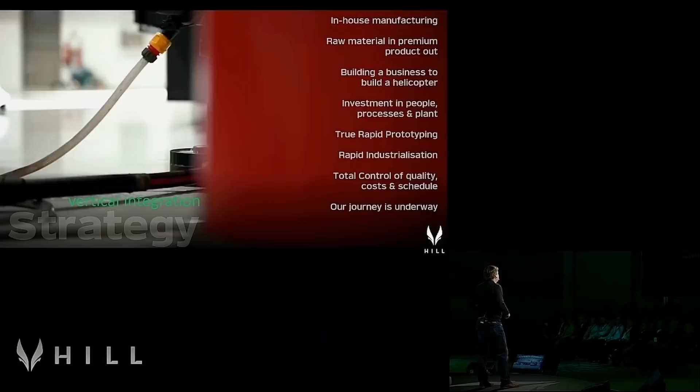In the aircraft community, there's been a big move for companies to stop seeing themselves as engineering companies and manufacturing companies and see themselves as technology companies. Manufacturing is the thing that you get other people to do for you. That's not how we see it here. Here, we're a manufacturing company.

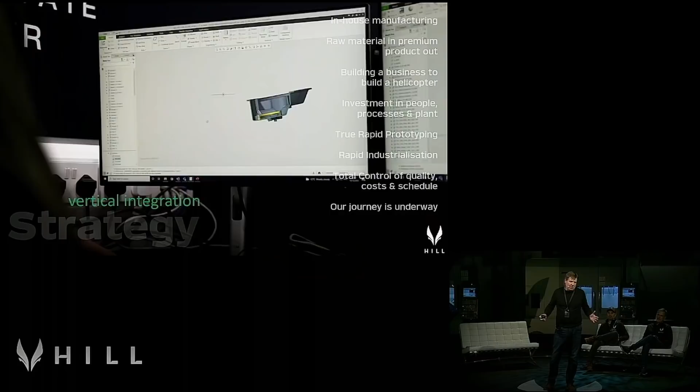So our vertical integration strategy is really taking aircraft manufacturing back to how we used to do it, back to how the Spitfire was made. We make stuff in-house. What that means is raw material comes in through the front door, we add the maximum value we possibly can here, and then we send a premium product out the front door. And what that means is we have absolutely total control over our cost base.

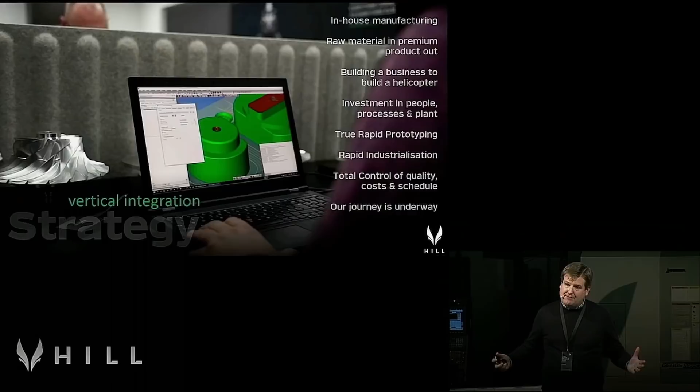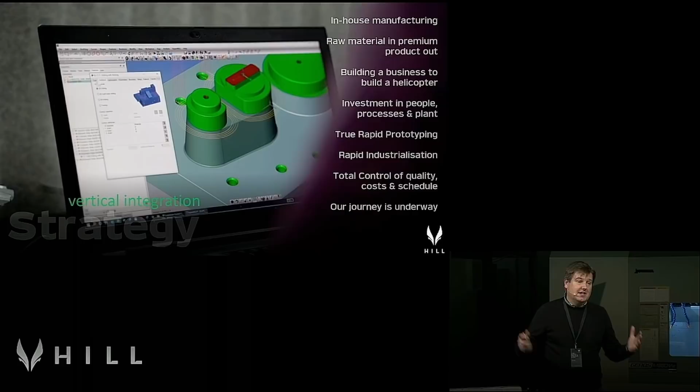And what that means for you guys is not only can we deliver you an aircraft at the right price point when you come to purchase it, but it also means we can control the cost of spares, and we can make sure the through-life costs of support are properly controlled. It also allows us to control insurance and everything else we need to do to make sure your machine sustains its value proposition as it ages.

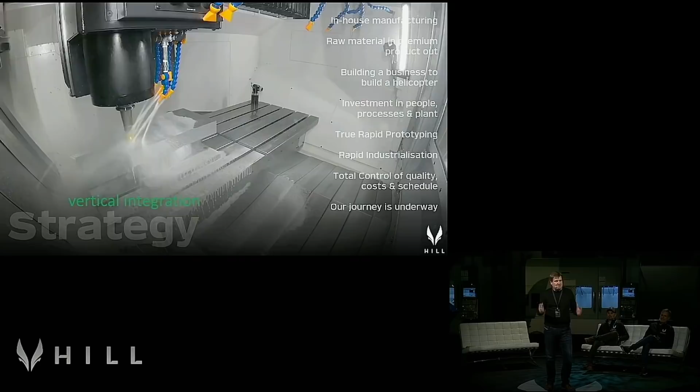Now, beyond all of that, if you're going to go and develop a business to make everything, that's a big business to develop. So a lot of what I'm going to show you tonight is about the journey we're taking to develop the business as much as the components and the aircraft itself. We're very busy investing in people, processes, and fabulous plants. We've got a wonderful team from our suppliers here to support us, and they've been fantastic in this journey we're undertaking together.

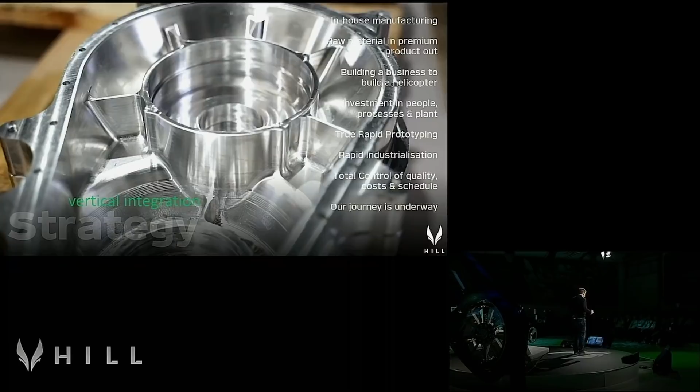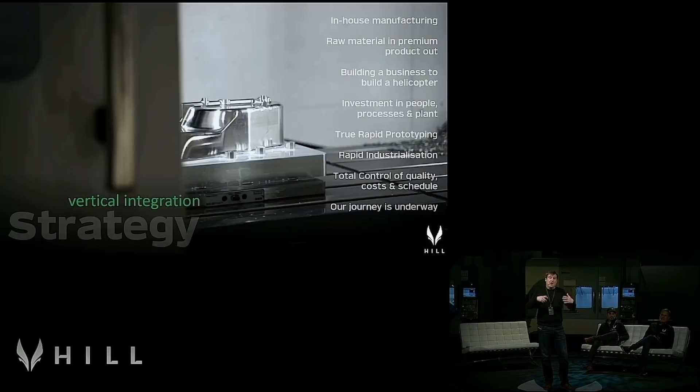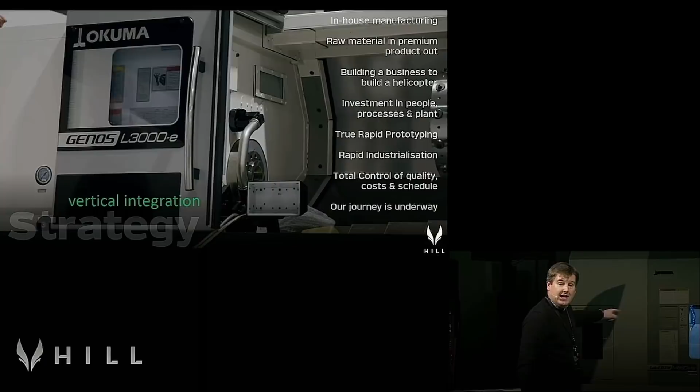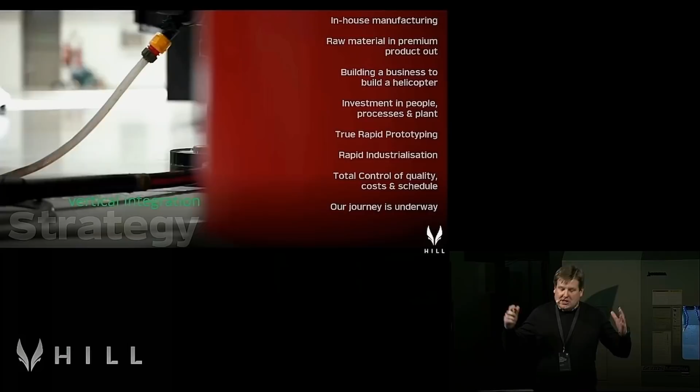But don't think vertical integration is just about making stuff yourself. It's much more than that. If you've got a lot of development work to do, it's also important that you can control the cost of developing prototype parts, of iterating things when stuff goes wrong, because it will. This isn't going to be a smooth ride the whole time. But the simple fact is, it's designed up there, we talk about it down there, it gets analyzed over there, and then they program the machines and we make it right there. Rapid prototyping doesn't get any quicker than that. There's no being beholden to other suppliers and outside firms that you've never got the volume to be interesting to. We can do it all here. It gives us complete control.

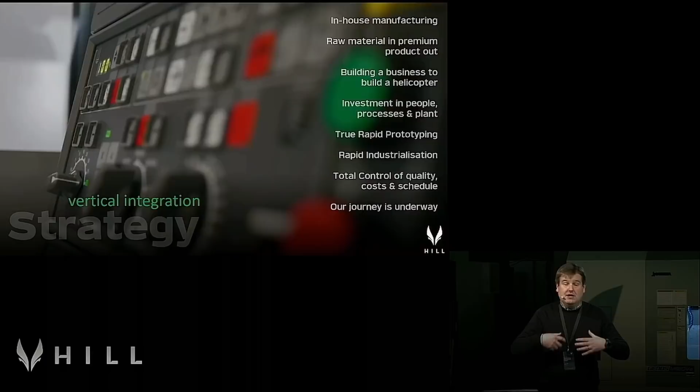And so that is really what underpins our ability to deliver an aircraft at the right price on a very sporty timescale, and to give you the confidence that we'll be able to support and keep the running costs of these aircraft really low into the future. So that's the strategy. And of course, what I need to do now is explain how we're delivering that and what we've actually delivered to date.

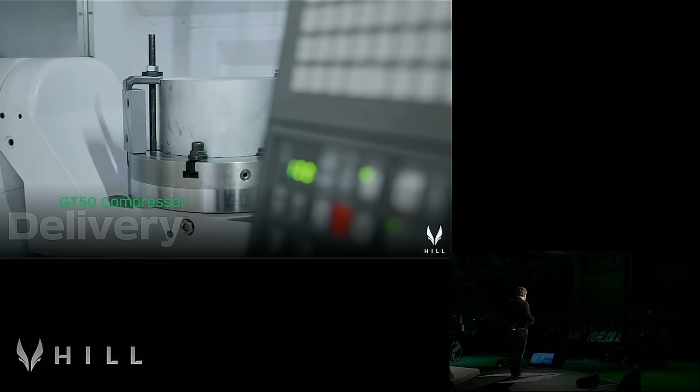So let's start with an overview of some of the precision machining stuff, which has been the big focus I've pumped out over the last month or so. The very first part of that is to look at the components of the engine we're starting with. The GT50 engine is absolutely crucial to the aircraft.

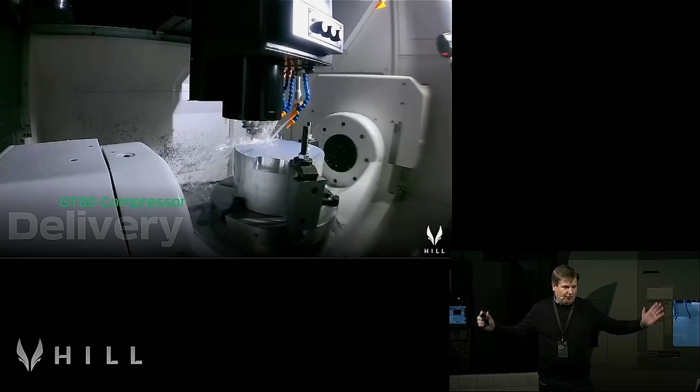The beauty of doing an engine and an aircraft at the same time is we can essentially design the aircraft that we want. You start with how much payload, how much speed, how much performance you want, and that defines what the engine needs to be, not the closest thing you can buy off existing manufacturers. But of course, to hit the price point, we also have to control the cost of the engine. And central to that is making our own compressor wheels, turbine blades, castings and casings, even our own gears and bearings.

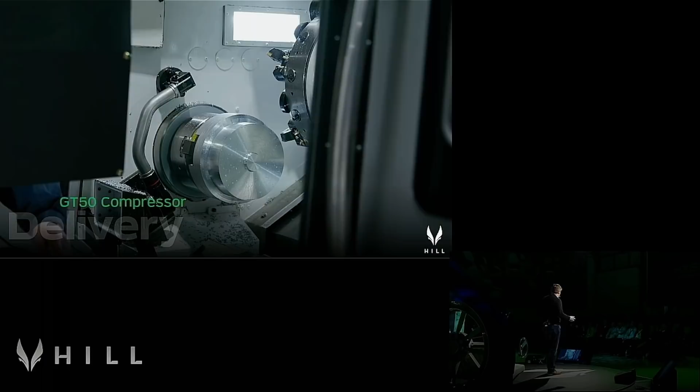And that really is what this first swathe of equipment we've invested in is all about. What you can see on the clip playing in the background is a walkthrough of the process we use to manufacture the centrifugal compressor, which delivers two and a quarter cubic meters of air every second at 8 bar, and then spits it out at nearly 400 degrees so the combustor can swallow it and create power for you.

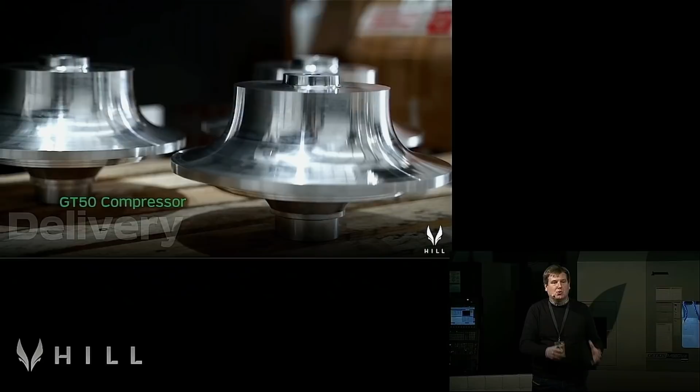The way this starts is we bring in the highest possible quality material, then take it over to the lathe, and once we've created a blank like you can see here, that goes and sits on the 5-axis machine, where we can start to cut away the teeth. Right now, what you see is some of the early process development work we've done, proving the tool paths, proving the cutter strategies, just getting the whole thing to work properly. That whole process has been done in less than two weeks.

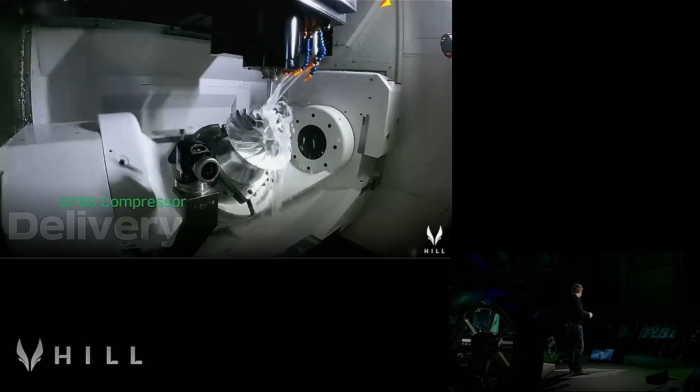So it gives you an idea that once you've got the right people and the right equipment, you can do this stuff really, really quickly. In a second we're going to go over to the 5-axis machine, talk about the key steps, and then get the machine moving so you can see it actually producing one of the very first compressors for the GT50 engine. Let's have a look at that now. We'll let this one play out, I'll make my way over there, and we'll go turn the machine on.

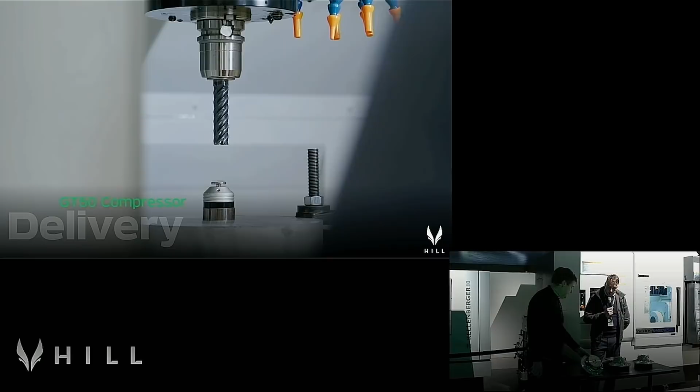As I've just outlined, we take raw material in through the front door, and then we've got to take it through a series of processes to make compressor blades. So Mark, why don't you tell us what's gone on here? This compressor wheel consists of three operations across two work centres. That first operation is done on the CNC lathe, which is a pre-op. It roughs the material out.

So this is really just about getting as much material out of the way as possible, as fast as possible.

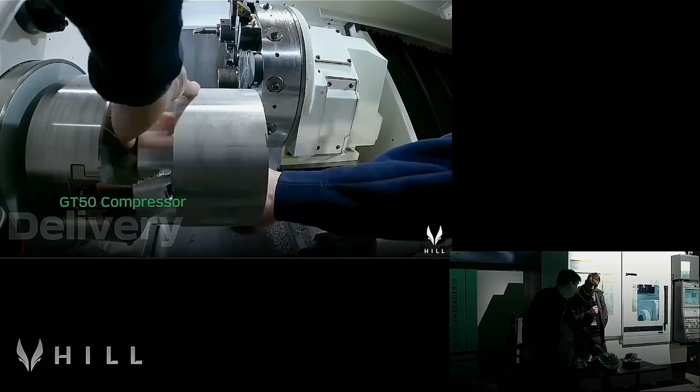And then we move over to the second stage. This operation is done on a 5-axis machine. That's a roughing operation, so that removes a very high amount of metal. So we're really just trying to form the blades as quickly as possible, at this point.

But they don't look very tidy. So what do we have to do next? The final operation is a finishing operation, which gives you the surface finish and the sizing that we require.

Because, of course, for these things to perform, the tolerances have to be extremely tight, the rotors have to be balanced extremely carefully, and we require a surface roughness of about 1.6 RA. Otherwise, we simply don't get the aerodynamic performance that we need.

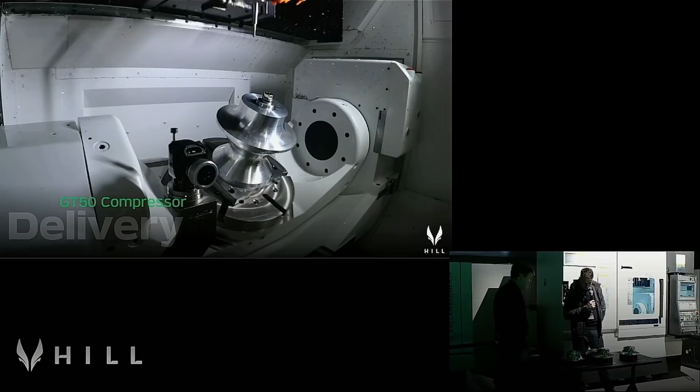So that's fantastic. The other thing this machine does is it's the same machine we use to manufacture our gears. So this is a partly machined spiral bevel gear out of the bottom of the main rotor gearbox. Manufacturing gears in-house is something we've talked about a lot over the last six months or so. That's incredibly important because helicopters are very much machines rather than aircraft, so it's vital that we can do those things in-house.

Okay, should we get the 5-axis running then? Okay, yes. All set? Can you get in there?

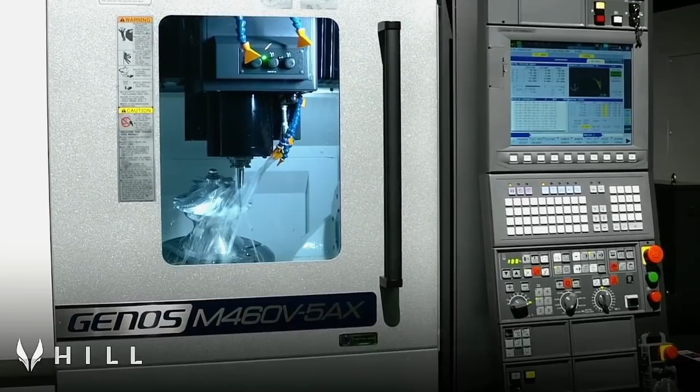So what you can see here is essentially the start of the finishing operation. We're moving from the rough blades towards the finished blades, and the purpose of a 5-axis machine is quite simply, it can take the part and swing it around whichever way it needs to so that the cutting tool can get access to the components it needs to shape.

Now, to put that in perspective, I'm sure over the years many of you have had to replace compressor wheels on various engines. This whole process for making the compressor is about a one-shift operation. We can produce these in between 8 to 12 hours at the moment. There's not a lot of optimization being done on this yet, as this process is 2 weeks old.

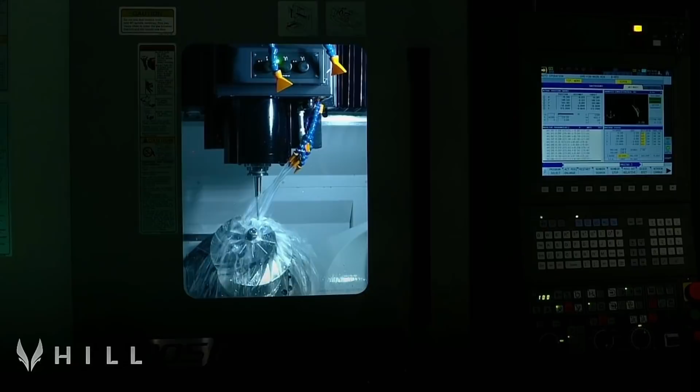And so that's the 5-axis machine. Got it. Let's move on from there. You can knock that off now if you like. Do you want to knock it off? Okay, you turn it off now, Mark.

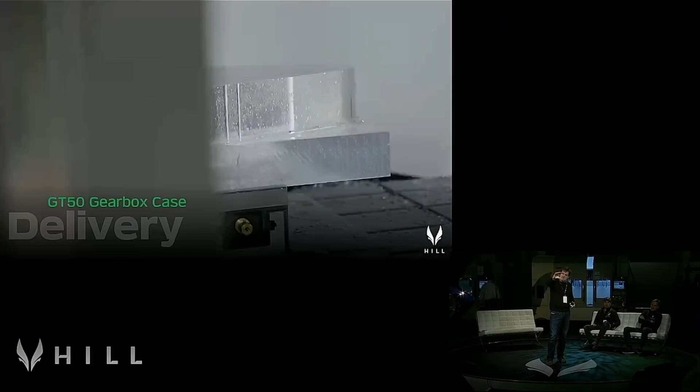So let's talk about the gearboxes. The 5-axis handles a lot of the most complicated parts in the engine, the gears, the compressors, and some of the fiddly things where you have to access the part from all sorts of different angles and directions. There are a lot of other things that are much bigger, that need equal levels of precision, but they're a little bit simpler. If we take the GT50's speed reduction gearbox, the thing that takes the input from the power turbine at 36,000 RPM and then reduces that down to a more usable 5,500 RPM.

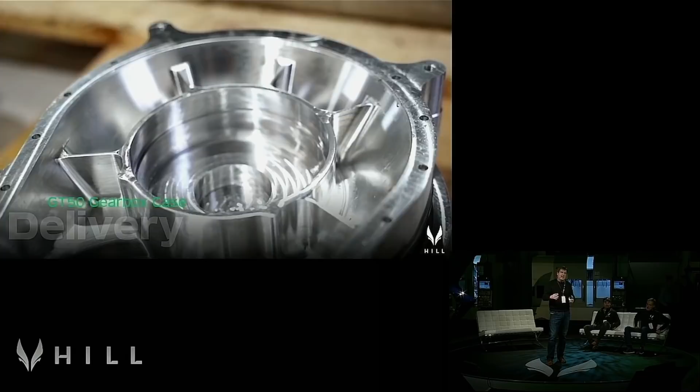Now we need to produce high integrity, lightweight gearbox cases that hold all of those gears in close tolerances to each other so that the gears run true and stand up to the life they need to see in service. Now, ironically, although the 5-axis machine looks really complicated and really clever, the manufacturing engineering that goes into producing things like our gearbox casing is actually much more complicated.

Because the machine's limited to only being able to move in 3 directions, we have to hold lots of work, create lots of work holding to hold the part on the machine, flip it over, and build the whole thing up with a series of different operations.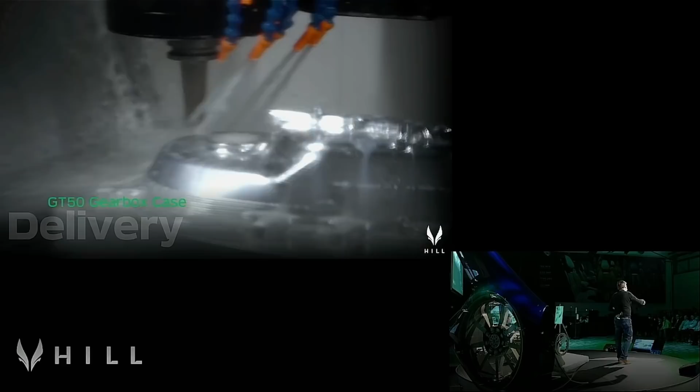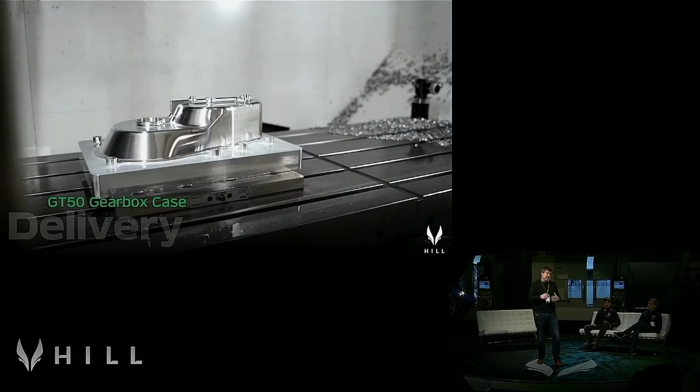You can think of this machine not just as a machine that makes gearbox casings and blade tools, it's actually the mother machine. This thing makes a lot of the tools we use to create wax injections for the casting processes, tools we use to make blades, some of the composite patterns and tools we'll use, as well as making finished components for the mechanical assembly of the aircraft.

So if we just go back over, we'll have a look at how the gearbox casing is machined, and then we'll have a look at the 3-axis machine working in a similar vein.

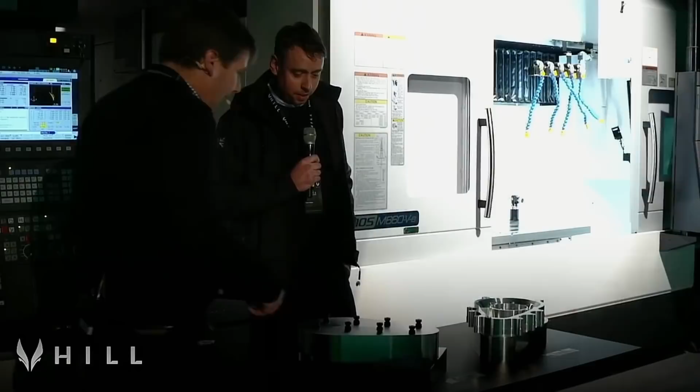So, Mark, what we've got here is what looks to me to be a great big chunk of aluminium. Can you just explain how we make these gearboxes? What are the stages in producing this gearbox? Correct, so it starts as a big lump of material.

This is the first operation where we put the profile in. We put these series of holes in as well. We then locate on those holes and machine the inside, the inner side here. Okay, so essentially it just gets clamped on the machine in a big vise to start with, but then you have to put these things in so that you've physically got something to hold it when you turn it over to machine that.

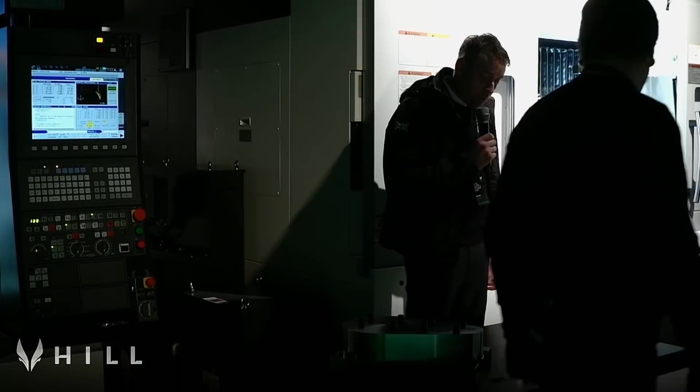Okay, and then once we've done that, how does it go on the machine? What does it actually look like on there? Right, so once we've done operation 2, we then locate on the bore, and then we locate on the machine and machine the second side. Okay, and those little tongs at the side, is that just there to hold it on there, or what? Yeah, correct, that's for clamping, and then they come off once it's all finished. Okay, smashing. Well, should we see it finishing off that part?

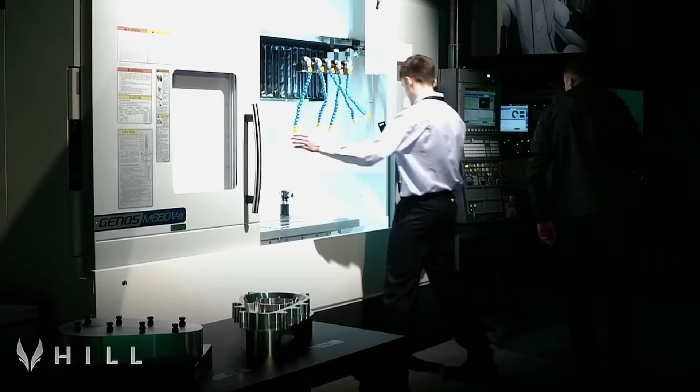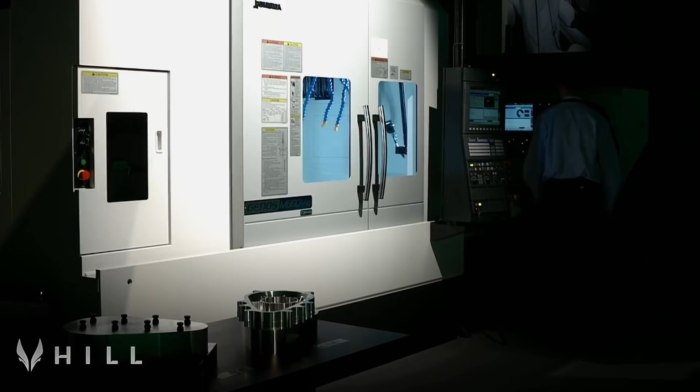Okay. Are you able to get any closer? Yeah.

We'll just have a look and peer in through the window so that you can see what's happening.

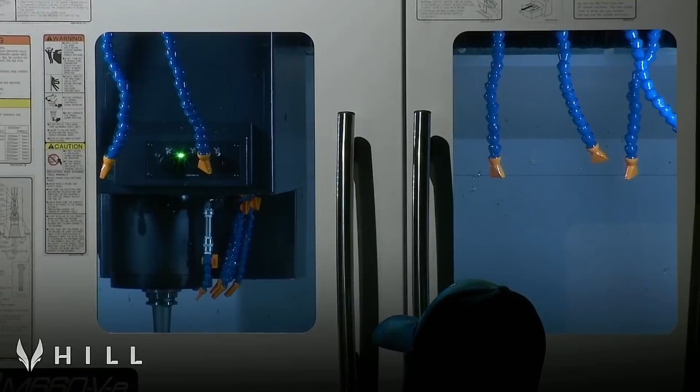So for those of you that don't know a lot about machining, these things are really glorified cutting tools where the cleverness in the machine is about how you can position the cutting tool so it can follow paths to sculpt out the things that you want to be manufactured from metal.

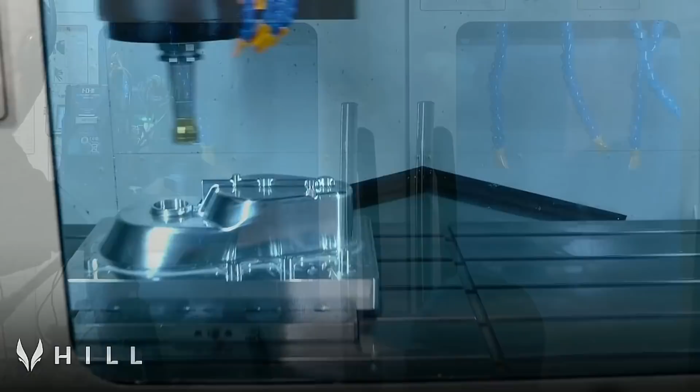And that'll go and machine away for hours on end until we've created the parts that we want. And that's essentially how your gearbox speed reduction casings are made, tools are made, and various other things across the platform.

Okay, you're off. Thanks, guys.

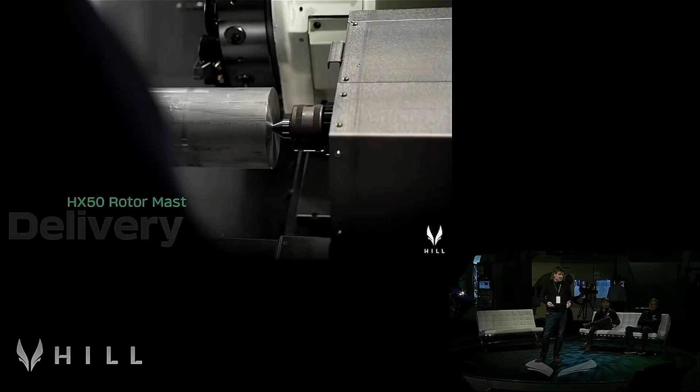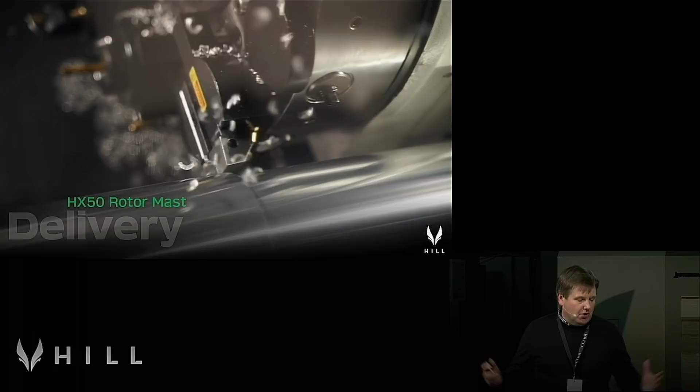So the next example I want to talk about is the rotor mast. Now, this is literally the part that we all hang off. So this has to be very, very high quality material, very precision, very tight tolerances, very close control on the surface finishes, because of course the mast is constantly subjected to cyclic load, so it's very prone to fatigue.

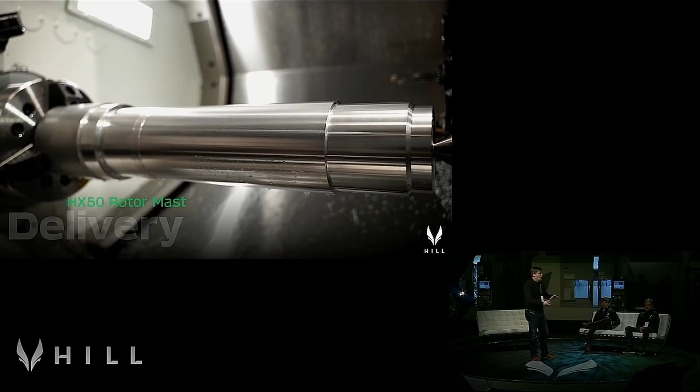So what we're showing you here is really just the first operation in the mast manufacturing. It has a profile cut onto the outside, and then it has some spline features on the bottom and top so that we can physically drive it on the top and drive it on the bottom. And then there's an equally precise operation required to bore up the center of the mast and cut away all of the excess material. So let's just go and have a quick look over here, and Mark can point out what we've got going on over here.

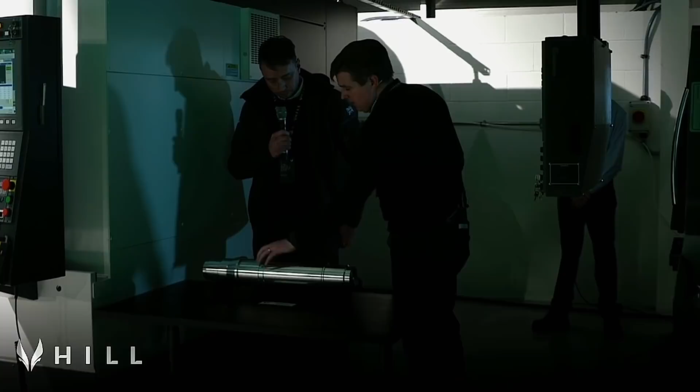So what state of manufacture is this in then, Mark? So the whole profile's been turned, both ends on this one. Okay, so essentially what we've got is the various shoulders and things that we need to be able to, all of the thrust for the whole helicopter is carried on that flange face there.

There's splines to be added down there later and here as well, so that we can attach the main rotor and attach the driving gears in the gearbox. And obviously it's still quite heavy because we've got to bore the center out of it. Yes, is that right? Yeah.

Okay, and then there's not much point in showing you that one live because we can't get the camera in, so we'll come back to that one a little bit later. Okay, the one other thing I'll say while I'm walking around, of course, is the newest machine.

This actually only arrived on Monday. This is our internal and external grinding machine, and this allows us to manufacture our own aerospace-grade bearings. The reason for that is because the cost of bearings in that industry is very, very high. When you're designing gas turbine engines, it's inevitable that you have to design special bearings anyway. So if you're going to design them and be the design authority, it makes sense that you carry that through and also manufacture them. So that's the new boy over in the corner over there.

One of the defining characteristics of our aircraft, one of the defining characteristics of the user experience that we're creating for HX50, is our digital cockpit. We're trying to create a new modern flying experience where flying is simple and engaging, reduce the workload, make it as easy as possible for people to fly, as easy as possible for people that don't fly that often to get back into their helicopter and be completely current to the greatest extent possible, and just make it as car-like and up-to-date as possible.

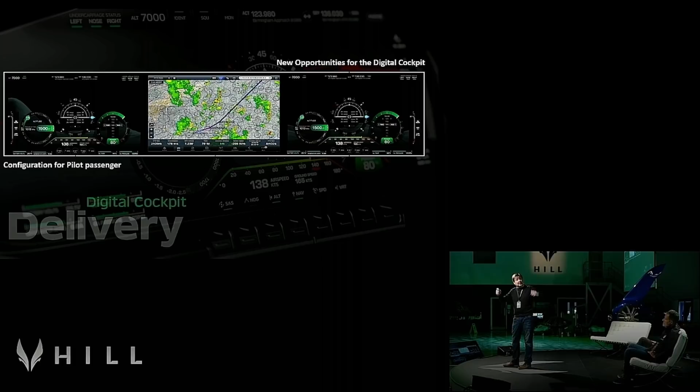There are multiple configurations of the system that you can use. You can use it as a pilot with a non-flying customer like this, or when you've got a second pilot with you and you're flying two up, you can both have the flight instruments, you both have control of all the systems, and you conveniently have the app of your choosing in the center screen.

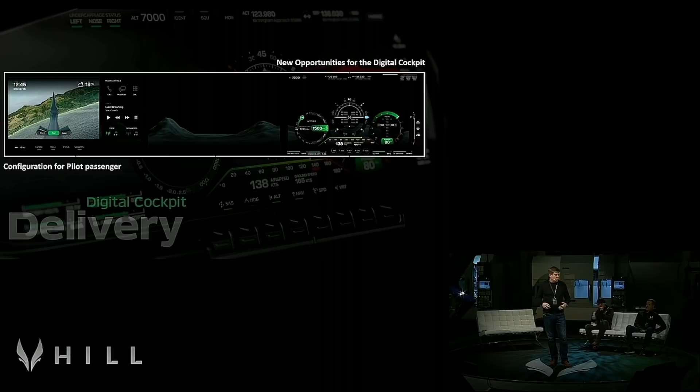That center screen, as you've probably seen on the demo, is bigger than the biggest iPad you can buy. So it gives you great visibility, much clearer maps, much easier user interface than you've ever had before. And of course, we can then wrap all of the synthetic vision and terrain awareness straight across the three screens, and we're just adjusting the user interface a little to disguise the mullions that you inherently get with modular screens.

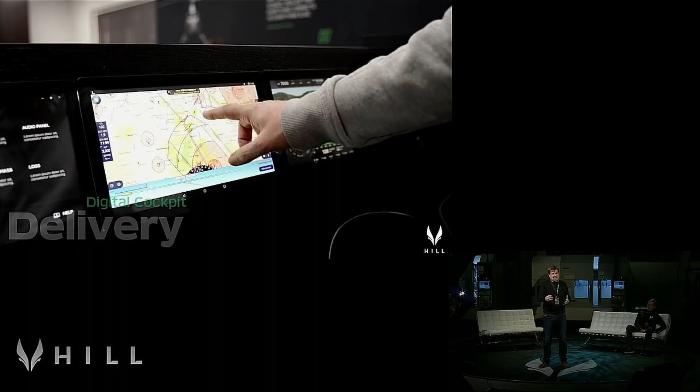One of the most recent things we've done, and I suppose this really sums up the culture we have in the company, is when we were presented with this opportunity to host the apps rather than just requiring people to have an iPad in the center, we put that out via the app to the user community and asked for their opinions. And with the exception of a couple of very valid technical comments we received back, it was unanimous: yeah, let's just have an uncluttered cockpit. As long as I can host my app, I'm happy.

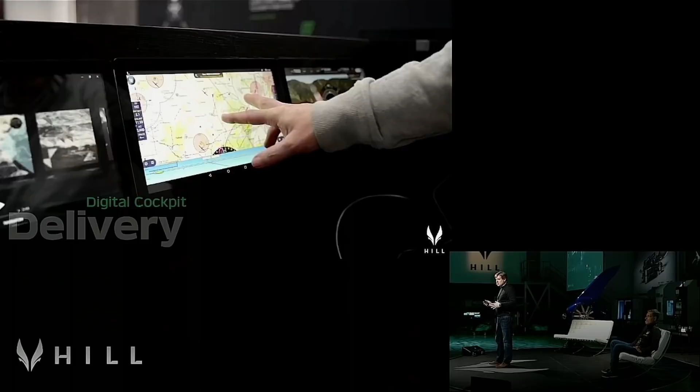So we've been busily over the last week or so taking the development screens that we've got in the lab over there and looking at different ways that we can host the apps that you all want to use.

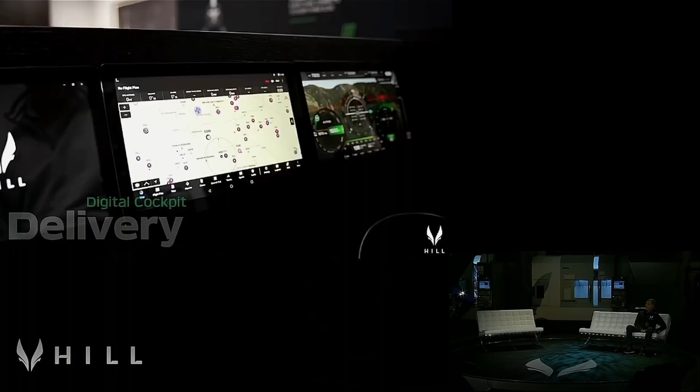So let's go over and have a chat to Martin and have a look at the development screens, and we'll have a look at the user interface and the apps.

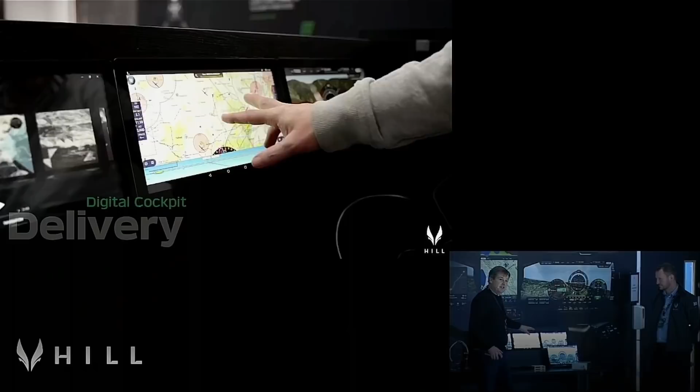So Martin, just tell us a little bit about the screens we've opted for here, and the Avidyne box and what have you. How do we deliver all of this? What equipment do we use to do that?

So the displays themselves are dumb displays. They're LCD displays, because we need high brightness - 1,000 candela per meter squared, which is really high brightness. We can only get that through LCD liquid crystal displays at the moment. They're 1920 by 1080 resolution, so very, very high resolution, also with anti-glare and anti-reflection, which is very important for the pilot experience. But they are dumb displays.

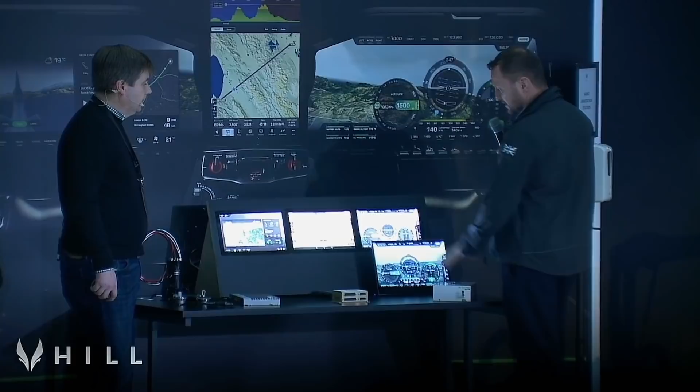The clever stuff sits behind it. We've got a main processor box for the right-hand seat, and another processor box for the left-hand seat. This guy can drive 2 screens, the left-hand seat guy can drive all 4 screens, including the IPI.

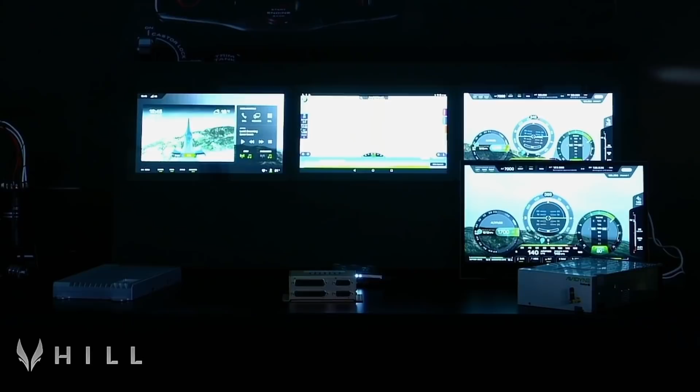Just a note on the IPI, you might have noticed, and some people commented, it's got a bit bigger. We looked at the smaller IPI, around 5 inches, and felt it was a bit too small. So we've gone that bit bigger, and Henry's had a challenge integrating it into the center console, but he's come up trumps, and we're all delighted because I want a big IPI in the center console.

What else? We've also got a small intercom - a blind intercom. The intercom will be controlled through the touchscreen interface. So all your comms will be managed by the intercom, but you manage it through the touchscreen. You won't have a dedicated control panel you're reaching down trying to read - it'll all be up on the touchscreen. The idea is that the user interface is as integrated as possible to keep your workload down.

Perfect, thank you very much. So what I didn't do when we started was introduce you - this is Martin Jakes, our Chief Electrical and Avionics Engineer. He's looking after all of this for us.

Now on the subject of electrical engineering, would you like to tell us what this is? That is a starter generator - a permanent magnet starter generator. This is a bit small for us; this is an 8.5 kilowatt starter generator, and we're at 10 kilowatts. This one spins really fast, and actually shows that we're not spinning that fast - this one spins at 120,000 RPM, and we're actually spinning at maximum 52,000 RPM. So the technology is there, it's available, and it's operating today, starting turbine engines today.

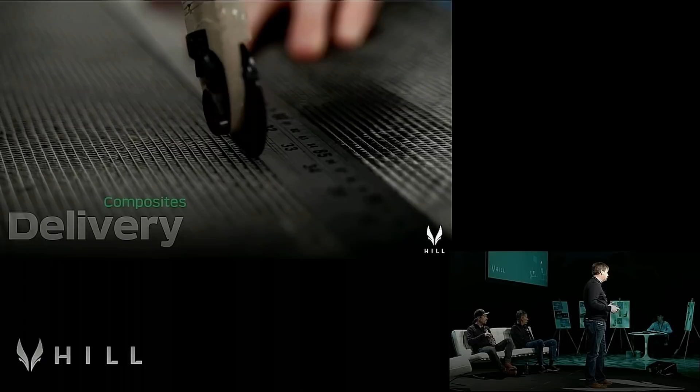Traditional composites are very expensive to manufacture. They require expensive materials, expensive tools, and expensive processes. One unique thing about how we're manufacturing the fuselage for HX50 is, rather than the traditional route using pre-preg, we're using dry fabric and infusion techniques - the same way they make boat hulls, wind turbine blades, and many industrial composites. There's no reason these processes can't be applied to aerospace, and many big manufacturers are looking at them too.

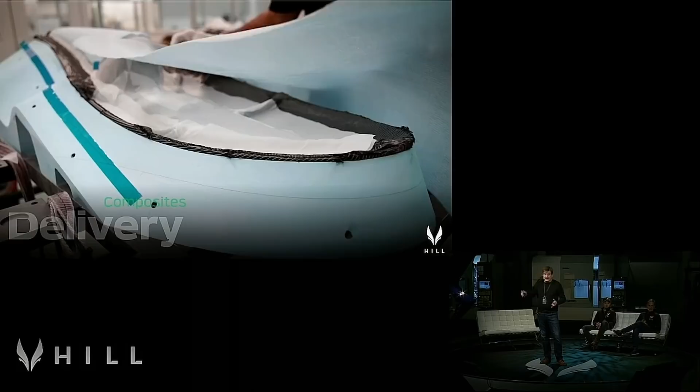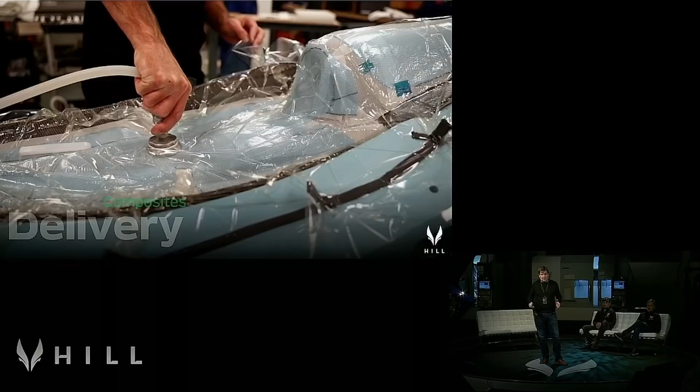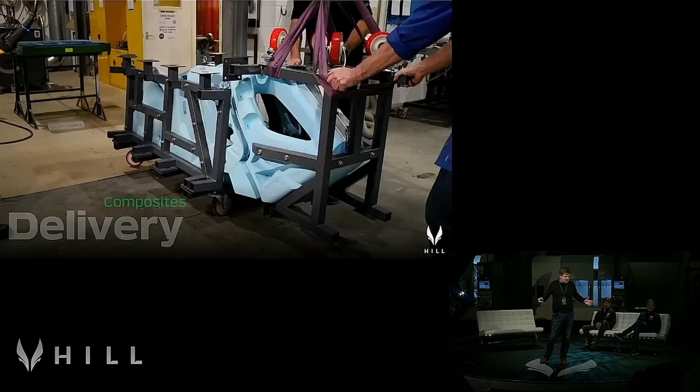But what we've done is taken that process and demonstrated that we can produce a single-piece fuselage using it. This matters hugely - not only for the piece price of the composite parts we make, but also the capital needed to set up composites manufacturing at scale. This is absolutely critical to everything we do within the company. The blades are composite, the crash cell is composite, the fuselage is composite, the boom is composite, and all the fairings are composite. This is a core technology for the business.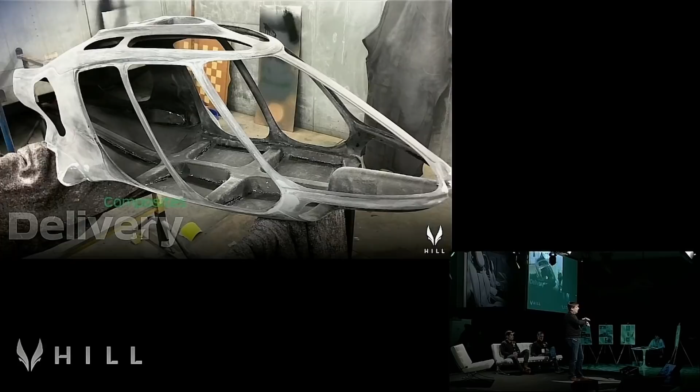The way we've proven out this process, before committing to vast expenditure on full-scale tools, is by producing the third-scale model you can see over there. It's there to prove we can manufacture this component as a single piece. That's what we've done, and it was actually only completed yesterday - so this stuff is literally hot off the press.

Within our WhatsApp group, we've been receiving daily updates from the guys down in Saltash, and from Tim, our guy down there as well. Right at the end of the day yesterday, we got this happy photograph of a pair of happy dads who had just given birth to their first baby HX50 fuselage. So let's go and talk to the happy father.

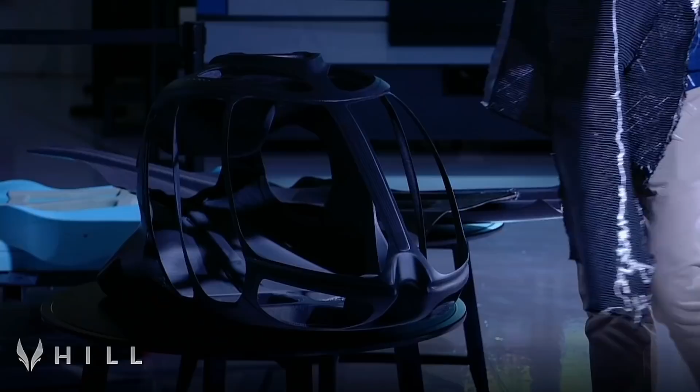So what you see before you here are the blue parts - that's the top mould for this crown section. You probably can't see it with the camera, but in the background there's the floor moulding. Basically that built up into a blue coffin-shaped mould, which we put all the fibres up inside. We found a little trick to help stick these dry fibres to the roof of the mould, which maybe Tim can expound on in a moment. We bagged it up - I put a pair of scissors through the bag, so we had to seal it again.

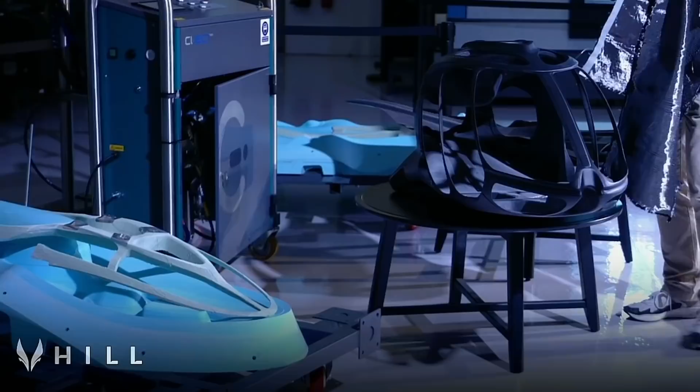And we infused the mould. It took us quite a while to set it all up because it's the first time we've done it. But the actual infusion process, you could see the resin rising up inside the part - 20 minutes to completely embed that moulding with the epoxy resin. This is our first attempt, and we're pretty chuffed with it. We're very happy with it. It has metallic inserts built into it, foam box sections for the floor, and all the structural elements that we want to capture in the real full-scale version.

I think that the key with this is really good preparation. Tooling is absolutely vital, and you can see the tools. Some of you have seen these earlier, but do come and have a look and prod them afterwards. We were really keen to take Tim's design and make a really good set of tools that we could mould off confidently.

Now, the thing about this tooling system, there's 6 parts here. There's 2 sides, a top, a bottom, a nose piece which we couldn't fit in the van, which you've seen in the video. But all those tools have to seal together with complete vacuum integrity, because this process, by infusing liquid resin into this dry fabric, it's absolutely key that you get really good vacuum integrity. So we've got a vacuum seal that goes all the way around these tools that holds them together. And then we can confidently put a bag inside the tool that holds all the fabric in place, and all the preparation is done - all the carbon and some of the consumables are in place. It's quite a complicated shape, as you can see.

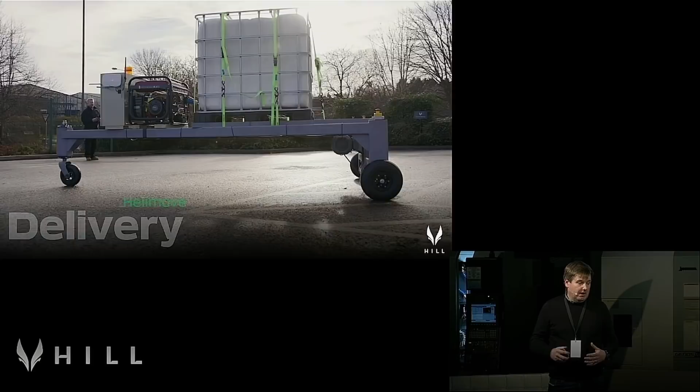There's a lot of development that goes into making hub motor drives small enough and light enough to balance just the right degree of performance with the limits on size and weight available for it to be viable for a helicopter. To do that, we've developed the Helimove test rig, as you've seen, which is a fairly crude-looking piece of equipment. You can expect lots more crude-looking bits of equipment from us over the next number of months. But this allows us to measure the torque actually required to get the equipment to climb curbs and trundle over soft grass. It also allows us to develop the smartphone app to let you maneuver it and get it moving around on the ground.

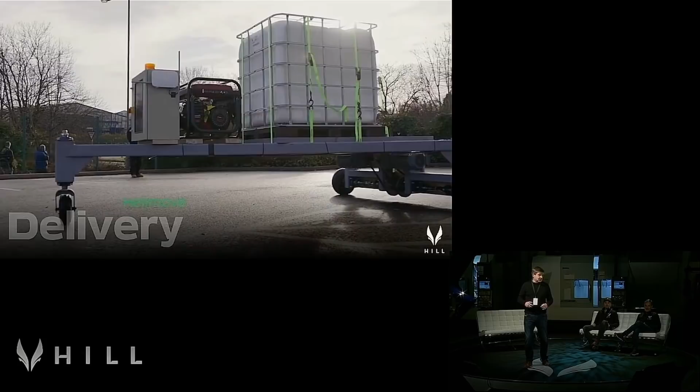The engineer who's been working on this for me - well, the two engineers working on this for me - one of them's off skiing at the moment, and the other one is Eric. So Eric, if you'd like to come and join me for a second.

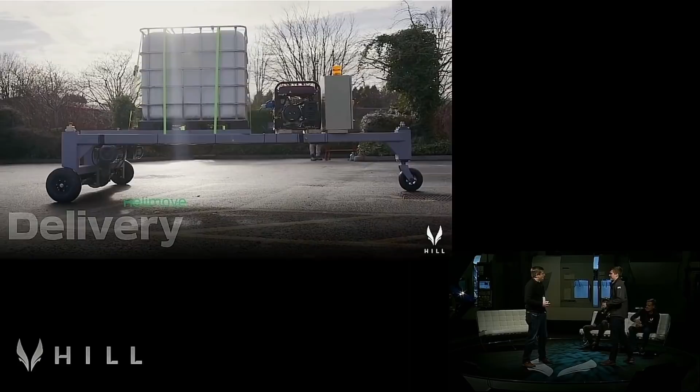So you've got about the most piloting experience of all of us at driving this thing. I think the thing most people are going to want to know is how easy is it to drive? Well, currently we have two ways of controlling it - using just kind of an RC airplane controller, and also using an app on the phone.

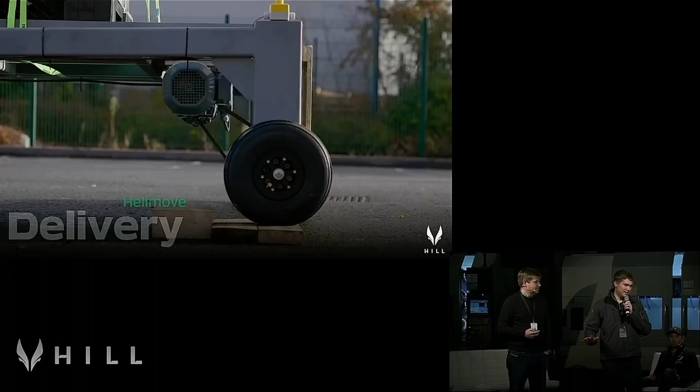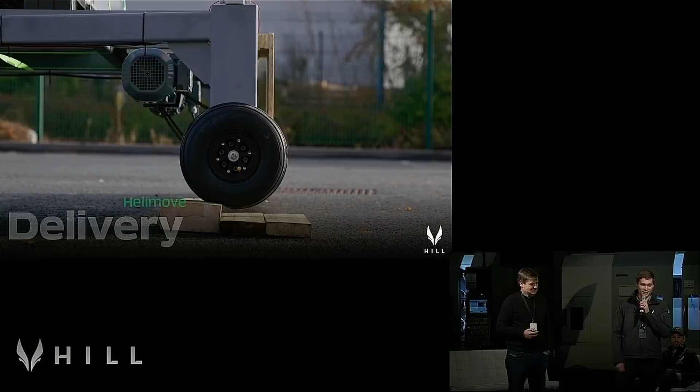Now, the RC controller works great, it's very controllable. Unfortunately, with the app right now, due to still trying to get the latency issues figured out, it's a little jerky, so still more work to be done on that. But it's really fun to drive around, and as you can see in the video, it's been really good to do some testing and collect some data we can use to develop it further.

So in terms of the RC controller you're using at the moment, how much training did it take you to learn how to use it? Was it something you could do straight away, or did you need to think about it a bit, in terms of driving it and maneuvering it on the ground? It was very intuitive and didn't take much learning at all.

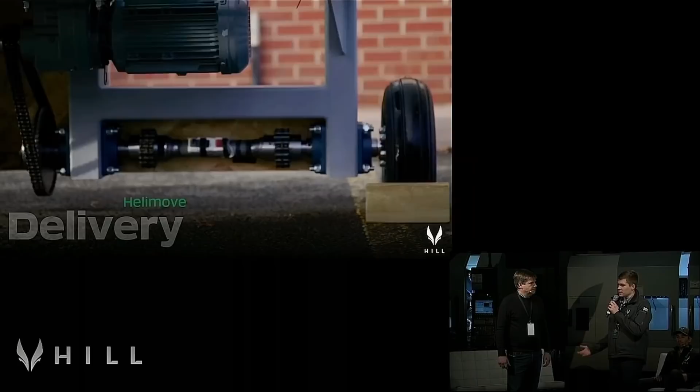Fantastic, and the app will be even easier. Okay, fantastic, well we'll get it in the field now and go get some data and measure it. Sounds good, thank you very much. Right, Eric Welch, ladies and gentlemen. Thank you, Eric.

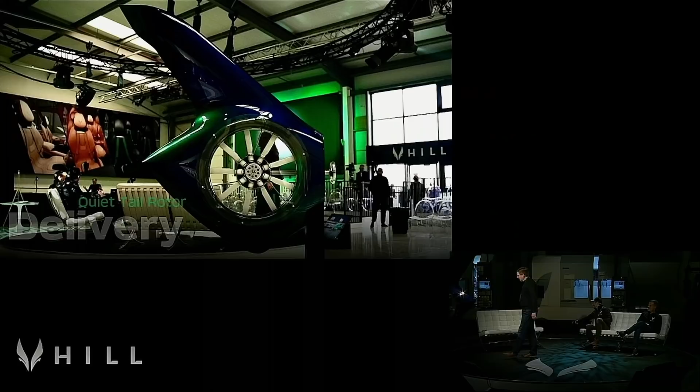Okay, you may have noticed there's a tail rotor behind me. If I had to qualify the two biggest threats that helicopters face in general, one is the environmental aspect, and the other is noise. Being able to develop a quiet tail rotor is absolutely critical to practical day-to-day operations for all of you that want to keep your helicopters at home. The less nuisance we can make to people, the better. That was really the primary thinking behind designing HX50 with a ducted fan tail rotor configuration.

There's much more to designing a tail rotor than just the noise. The performance is very important, and I've shared over the last month or so that the tail rotor configuration we have at the moment has outstanding performance, all the way up to max gross weight on an ISA plus 15 day at 10,000 feet. You'll still have full controllability all the way up to about 35 knots from any direction. So this is a profoundly powerful tail rotor system.

And of course, if you want a lot of tail rotor authority, you have to put a lot of power through the tail rotor to drive it. So one of the things the guys have been focusing on recently is the detailed development of our little tail rotor gearbox that you can see over here. As you can see, it's fairly conventional in terms of its general arrangement. We've got an exaggerated bell crank for today, just so you can change the pitch on the blades. But the tail rotor gearbox is coming along very nicely.

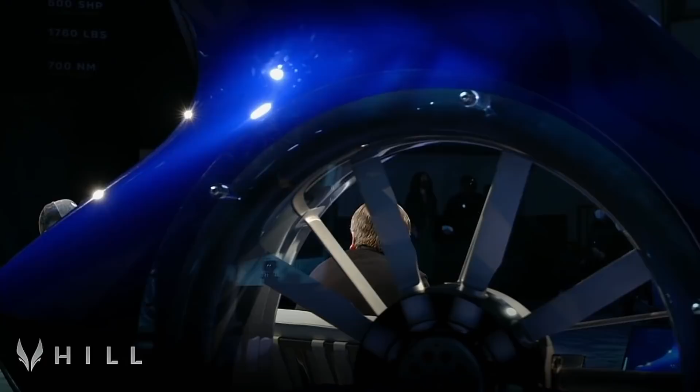But at the same time, you have to be rational. We've got all of these things going on in parallel. There's an awful amount of technical challenges and risks to manage as we go through the program, so we can only deal with those as we uncover and face them. But as we stand at the moment, the roadmap we're laying out is for that aircraft to be built at the end of the year, and as soon as it's done its ground runs, we commence the flight test program.